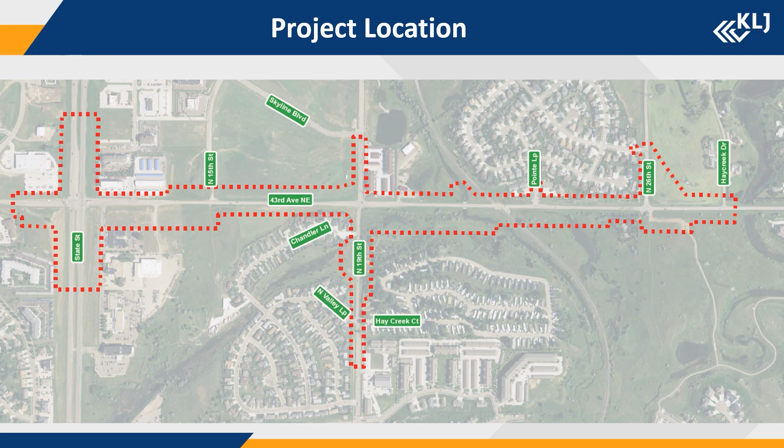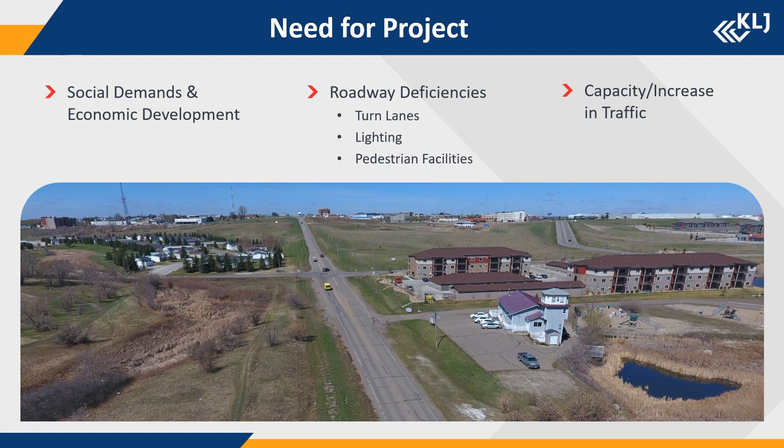Now to talk about the need for the project. Social and economic demands, safety, and roadway deficiencies are the main drivers. These issues relate to traffic operations, mobility, and network connectivity throughout the corridor. There are several new developments adjacent to and surrounding the corridor that require upgraded infrastructure to continue to thrive. The current roadway only accommodates a single lane of traffic in each direction. Along with increased development comes increased traffic. The proposed road will increase traffic capacity and improve safety with the addition of turning lanes, intersection controls, street lighting,

and pedestrian facilities. We want to be sure to communicate a little bit about the project vision here. The project will tie into the previously constructed 4-lane road west of State Street and the proposed 3-lane road east of 26th Street that Burleigh County is scheduled to build in 2021. The forecasted traffic volumes on the east side of this project are about 2/3 of the anticipated future traffic volumes on the west side. From west to east through this corridor, the adjacent land use also transitions from commercial to residential. So a project objective is to determine the vision of a corridor and how that transition will actually take place. There are options that will determine where the roadway will transition from a 4-lane to a 3-lane.

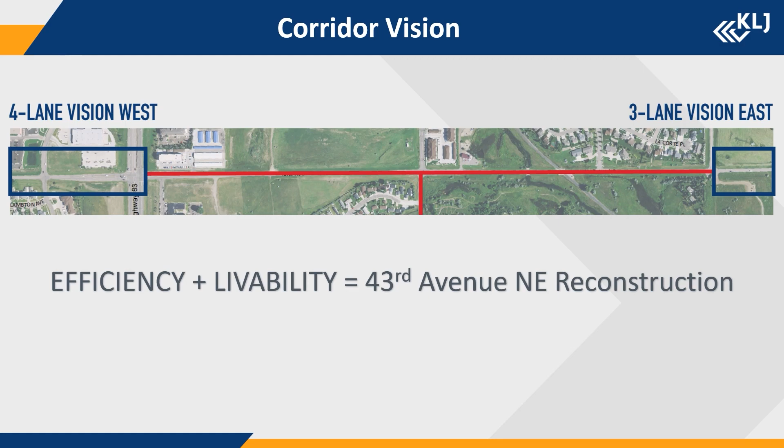These options will be explained in detail later on. The corridor vision, which includes things like number of lanes, intersection types, pedestrian features, defines and balances the relationship between efficiency and livability as this transition occurs. There are two primary alternatives proposed for this project. First is a build alternative, and then also a no-build alternative. The no-build would leave the corridor as it is today without any proposed improvements. The build alternative would reconstruct and urbanize the corridor.

Accompanying the build alternative are several different sub-options to be considered. In the next several slides, I will discuss the proposed improvements and options in detail to help provide a full understanding of the project.

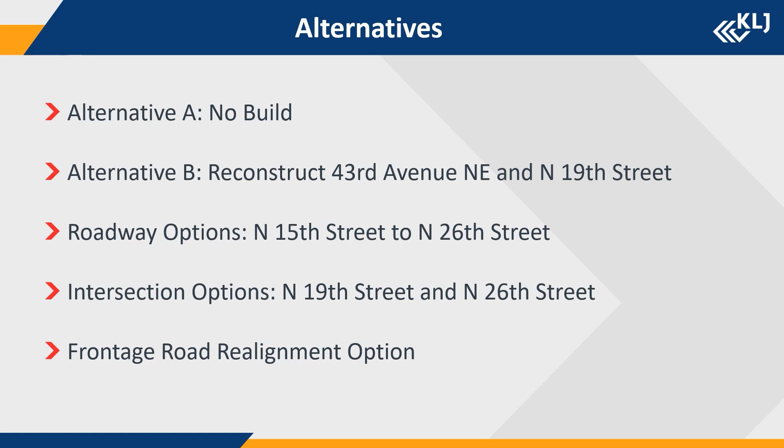This graphic depicts a typical section of a 4-lane road. This typical section includes 2 lanes in each direction, a raised median, a shared use path on the south side of the road, and a sidewalk on the north side. For reference, this would be basically the same roadway configuration as the 43rd Avenue project constructed this past summer between Washington Street and State, but with the shared use path transitioning to the south side of the road.

This is due to increased pedestrian infrastructure and potential connectivity on the south side of the corridor. Pedestrian crossings and a new traffic signal would be installed at the State Street intersection to facilitate this transition from the north to the south for pedestrians.

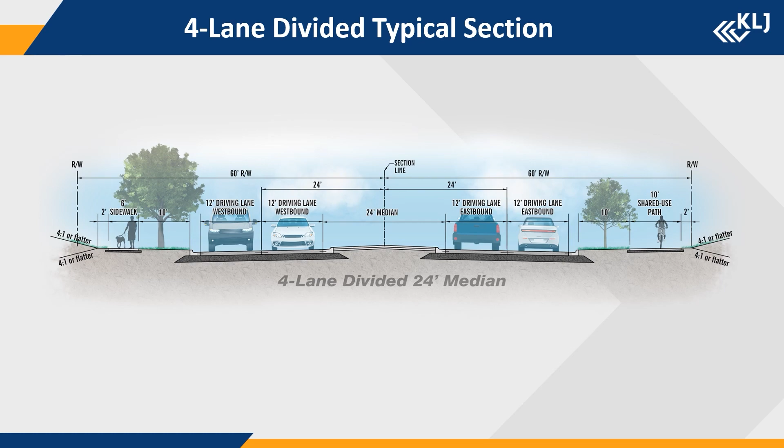In this graphic, we're showing a typical section for a 3-lane roadway. The typical section includes 1 lane in each direction, a raised median, a shared use path on the south side, and a sidewalk on the north.

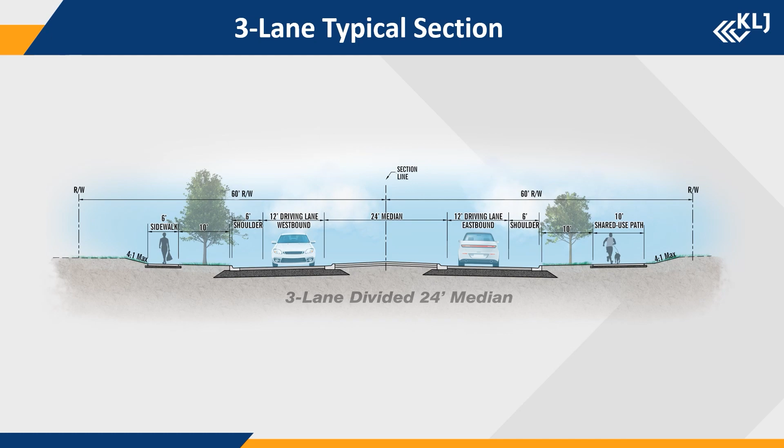You'll note that the additional shoulder is included with this typical section. That's intended to provide a refuge for maintenance or stalled vehicles, as well as providing additional area for snow storage in the winter. Over the next several slides, we will step through the proposed options as seen from plan view.

As I mentioned, this project is a continuation of the reconstruction that just took place this past summer in 2020. Beginning at the very east end of that project, the State Street intersection, this new proposed road will start with a 4-lane section as shown on this concept drawing.

There will be a new traffic signal installed at State that will accommodate east-west pedestrian crossings on the north and south side of the intersection.

At the intersection of State and 43rd, double left turn lanes will be striped for southbound motorists turning from State Street left onto 43rd Avenue heading east. The shared use path on the north side of 43rd Avenue west of State will cross from the north to the south at this intersection.

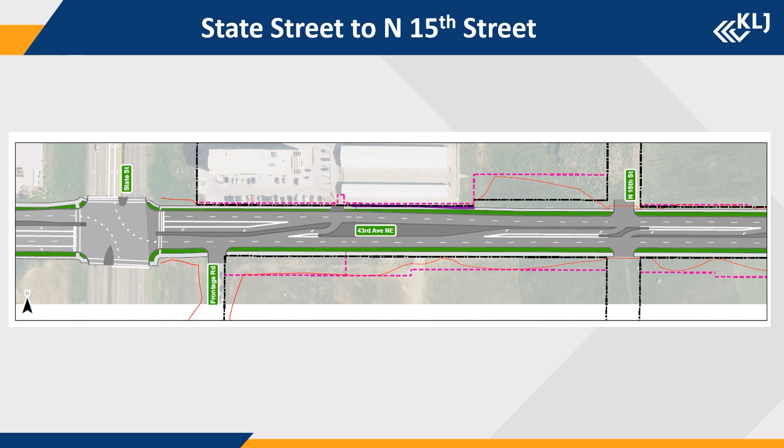Then a sidewalk will be constructed on the north side of the new proposed road heading east. This project will also address the access to the State Street frontage road.

The current frontage road intersection with 43rd is only about 180 feet from the State Street intersection, and it's at a fairly steep grade. So an alternative is to realign the frontage road to the east and create a connection with 43rd via 15th Street.

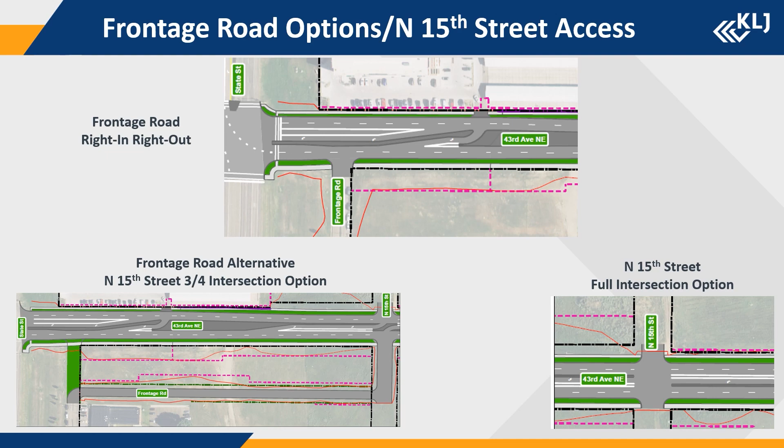The realigned frontage road could potentially intersect 43rd with either a full access or 3/4 access intersection. However, it should be noted that this option increases construction costs and requires purchasing additional right-of-way.

The road would be divided with a raised median from State to 19th. Then a 3-lane road would continue east from 19th to the end of the project at 26th. One of the benefits of this option is the additional westbound lane acts as a climbing lane for large vehicles upon departing the North 19th Street intersection.

Again, to reiterate the intent for both options, 43rd Avenue would ultimately be a 3-lane road east of 19th all the way to the end.

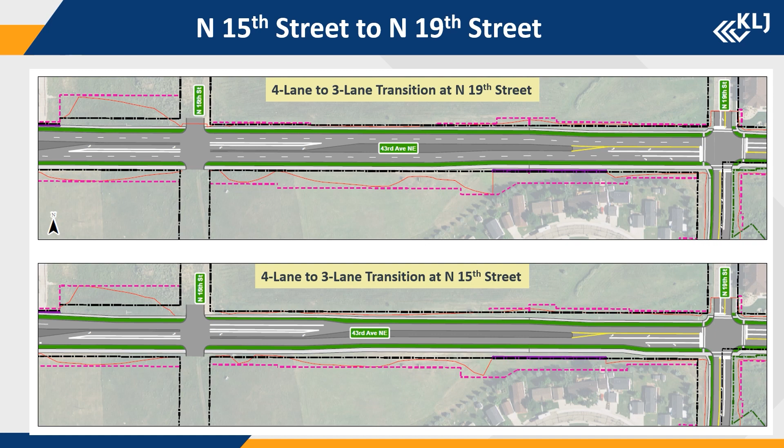43rd Avenue will either have a raised median, similar to the option west of 19th, or it'll be a flush 3-lane roadway similar to East Divide Avenue from 26th to the Bismarck Expressway if you've driven that stretch of road.

A key difference between these options is access to the River of Hope Church and daycare. If a flush median is selected, the current church access is proposed to be shifted east to allow adequate storage for the westbound left turn onto North 19th. This configuration would maintain full access to and from 43rd.

Drivers intending to travel east would need to utilize the proposed roundabout to turn around.

Further east from 19th is the railroad crossing. As part of this project, the crossing will be improved as part of the primary build alternative. The crossing will remain a concrete at-grade rail crossing with larger crossing arms and pedestrian crossing facilities on each side.

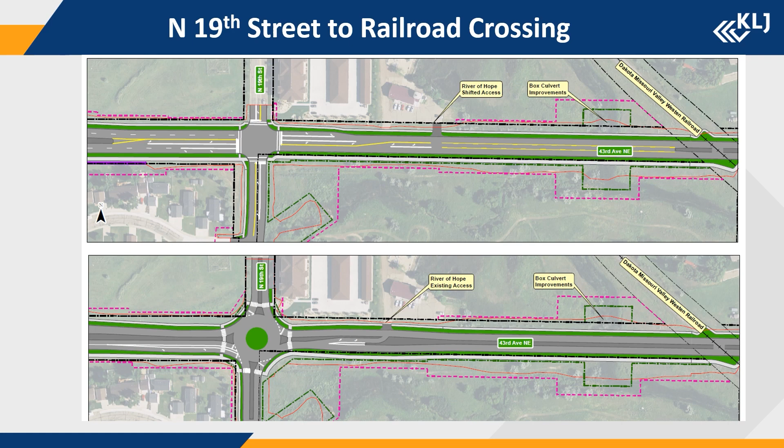A grade-separated crossing was considered, but we determined that wasn't going to be cost-effective, mainly due to the terrain in the area and also the fact that there is a low volume of rail traffic.

Similar to 43rd Avenue, these options are based on the intersection type that will eventually be selected at the 19th and 43rd intersection. Currently, 19th is a two-lane rural section from North Valley Loop to 43rd Avenue. At the existing intersection of 43rd Avenue, the southern approach of 19th is offset approximately 20 feet to the west of the northern approach. Depending on the intersection type selected, 19th Street may have to be realigned to line up with the northern approach. Regardless of the intersection type, North 19th Street will be reconstructed from 43rd to North Valley Loop as a 37-foot road with curb, gutter, and storm sewer.

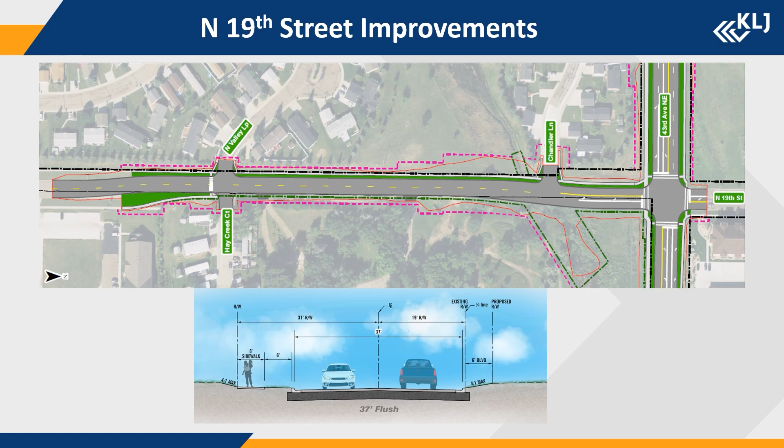A sidewalk will also be constructed along the west side of the roadway, as shown in the exhibit on screen. Also, the existing culvert under North 19th Street is proposed to be replaced with a box culvert to better facilitate drainage. All right, so now we'll focus our attention on the 19th Street intersection traffic control.

One option here is a roundabout intersection. This would be constructed with a 130-foot inscribed circle diameter. The roundabout would be centered in the intersection and would not require realigning the 19th Street south leg here, as I mentioned earlier. The roundabout provides a capacity benefit and added safety benefits by reducing conflict points and reducing the severity of crashes. The roundabout intersection would include a continuation of that raised median heading to the east of the intersection as well. Another option is a signalized intersection.

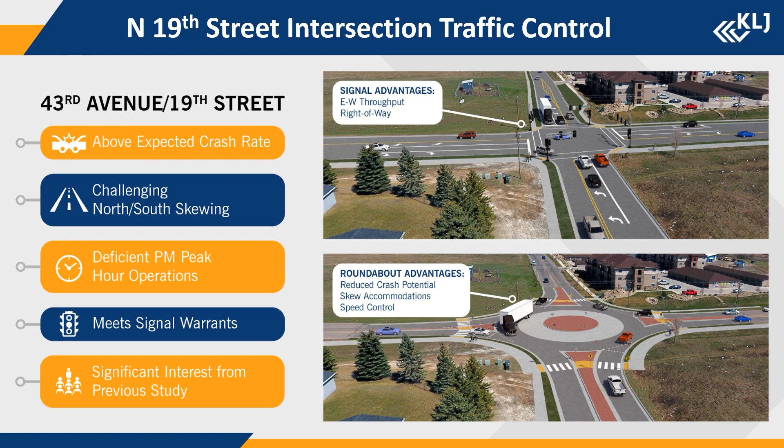This would construct a standard intersection layout with signals. However, it would require realigning that south leg to better align the north and south approaches to the signalized intersection. The signalized intersection has the advantage of better adaptability if traffic numbers grow beyond current traffic projections, and it's consistent with the corridor west of State Street as well. However, this option would require more right-of-way acquisition and greater wetland impacts.

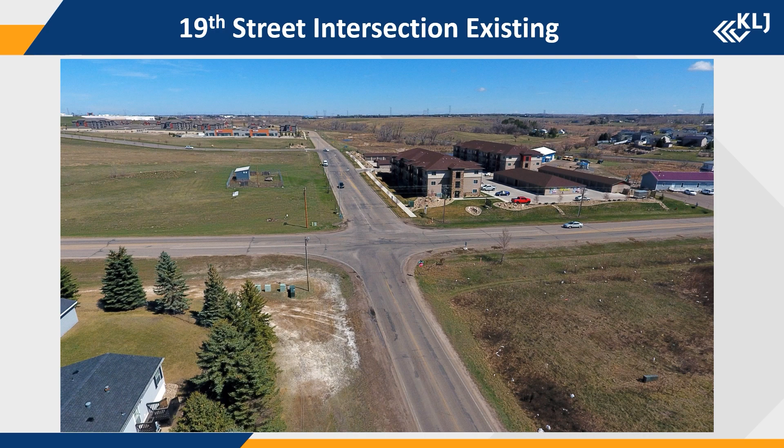The next few slides just show the same intersection with a couple of different perspectives. This slide is an aerial photo of the existing intersection looking north. And here, again, you'll notice the offset and the skew that I've been mentioning. That offset actually blends pretty well with the roundabout at this intersection.

Again, roundabouts naturally slow speeds in the whole corridor, and with those slower speeds comes reduced risk and reduced severity of crashes. Roundabout crashes are generally merge and diverge type crashes, where signalized intersections tend to be more crossing type crashes. Another note is that roundabouts have about 25% of the potential conflict points of a signalized intersection by comparison. Although the roundabout does not have protected pedestrian crossings, it does reduce the number of lanes pedestrians have to cross at a given time. This gives pedestrians time to focus only on one lane at a time when crossing.

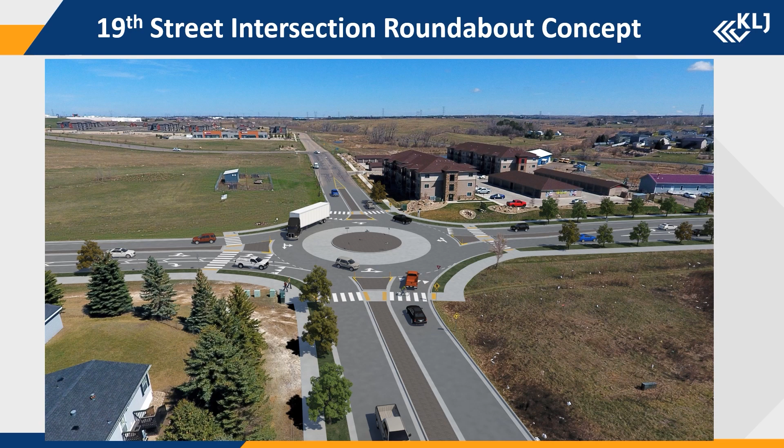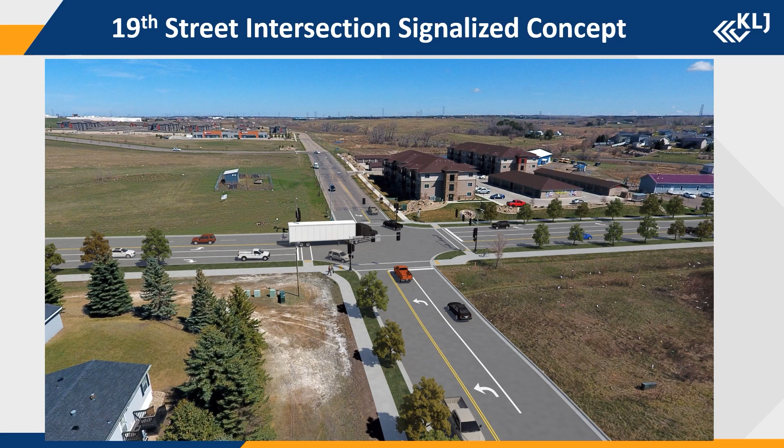The signal will also adapt to increased traffic over time. Again, this option would require realigning 19th Street on the south approach so that the north and south legs would line up across from each other. And that increases the amount of right-of-way acquisition and the degree of wetland impacts.

Okay, and now we are moving east in the area of the 26th Street intersection. The graphic on your screen is showing three different options for this intersection. The first, that's shown in the top pane, would reconstruct the intersection in its current location. This option would function adequately as a two-way stop-controlled intersection. However, if a signal was ever needed, the steep grade of 43rd would not allow pedestrian crossings to meet standards required by the Americans with Disabilities Act.

These requirements restrict the cross slope of a protected crossing. If a signal was installed at the existing location, cross slopes would be 2 to 3 times greater than what's allowable. The steep grades also present a safety concern when vehicles are trying to stop at a red light during winter driving conditions. So then when you look at the two panes in the lower right, the next two options shift the intersection to a flatter point along 43rd Avenue, uphill and to the east. At this location, two options have been identified, a roundabout and a signal.

By shifting the intersection east, the intersection location would meet ADA requirements if a signal is ever warranted in the future. It's worth noting that the roundabout option would allow more effective intersection control today with the current project, as opposed to waiting for traffic volumes to increase and only then requiring a signal. There's an inset picture on the lower left of your pane that we'll address as well.

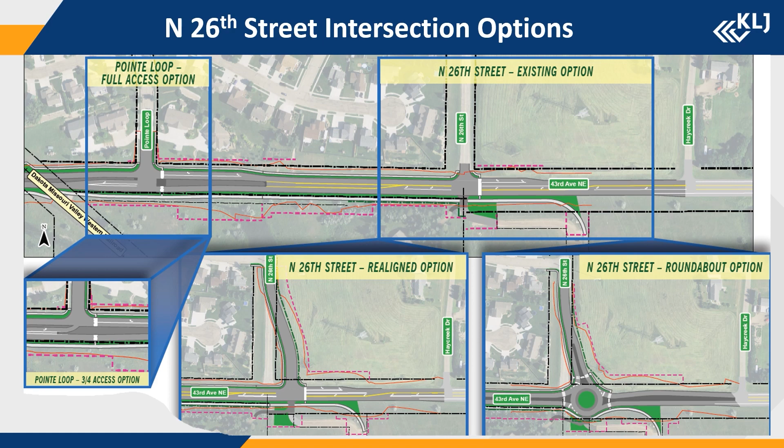The access reduction is based on City of Bismarck's access management policy. The policy permits no more than 5 access points per mile on each side of a principal arterial, and prescribes a minimum spacing of a quarter mile between high density or commercial access points.

It's worth mentioning that along with surface improvements along the corridor, this project will include significant municipal utility improvements. The new water main continues the city's implementation of its master plan. The primary component is extending a 24-inch transmission pipeline from State Street to near the intersection of 26th, along with valving to enable pressure zones 2 and 3 interconnection options.

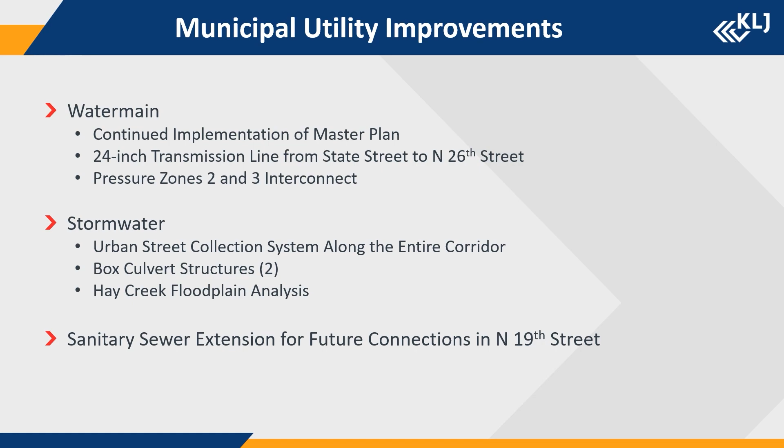The existing road conveys stormwater via roadside ditches right now, so the proposed project would incorporate curb and gutter along with new storm sewer that will outfall into Hay Creek. Box culverts will be installed at the low end of 19th and at the Hay Creek crossing of 43rd Avenue, which also will require a floodplain analysis of the surrounding areas. Finally, a small portion of sanitary sewer will be built extending along 19th to the south.

The next couple of slides are going to address construction phasing. Red indicates where we anticipate work occurring, and yellow where we anticipate detours. Due to the terrain and proposed improvements, closing the roadway during reconstruction and doing this in phases is really the only cost-effective approach to getting it built.

The project is proposed to be done in 3 phases. 2 phases will accomplish the 43rd Avenue construction, and the 3rd phase will be for 19th Street. Phase 1, shown on your screen here, would close 43rd Avenue from 19th to 26th and reconstruct that portion of road and utilities. Traffic would be detoured onto Centennial Road, Century Avenue, and 19th Street during this closure. Access to the Pointe subdivision would be maintained at North 26th during this closure.

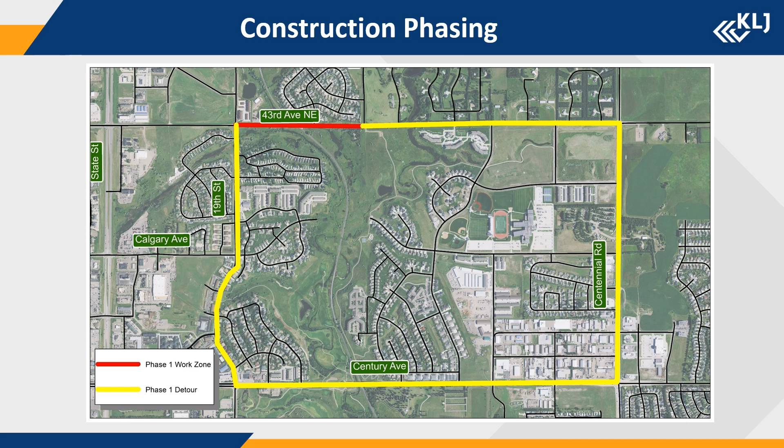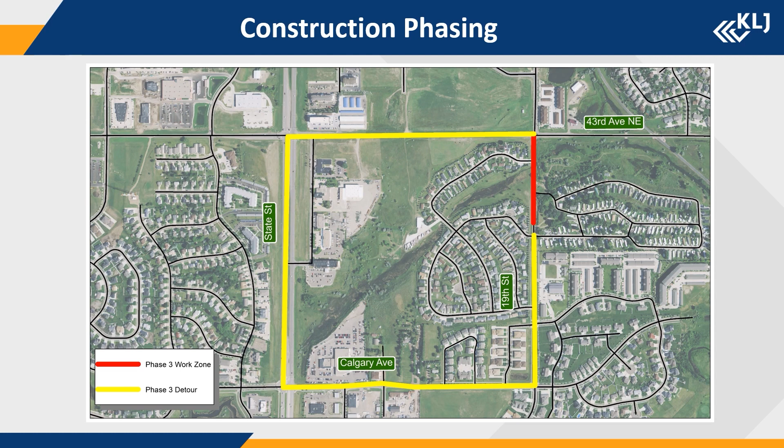As I mentioned, phase 3 is 19th. The 3rd phase will close 19th just south of North Valley Loop, up to 43rd Avenue. Chandler Lane and North Valley Loop will access North 19th via the southern approach of North Valley Loop, and access to Yucca Lane will be maintained as temporary during the closure. Traffic would be detoured onto Calgary, State Street, and 43rd Avenue.

Because the project will utilize federal aid funding, impacts for each alternative have to be determined and an environmental document prepared explaining all alternatives and options, outlining the environmental impacts for each one. These impacts include items such as wetlands, cultural, threatened and endangered species, and noise considerations.

Depending on the options, wetland impacts range from about 1.16 to 1.19 acres of permanent impacts. There are 2 options to mitigate wetlands impacted due to this project, either on-site mitigation or purchasing wetland credits. It's the intent of this project to mitigate wetland impacts on-site. Right-of-way acquisition ranges from 2.1 acres to 3.7 acres, depending on which roadway configuration is selected. Temporary easements are estimated to range from about 6 to 8 acres, depending on the alternatives again.

Following an evaluation, the proposed project was determined to meet the definition of a Type 1 project, thereby requiring a traffic noise analysis. Existing and projected future traffic noise levels were modeled to determine the potential increase in noise levels as a result of each alternative. The traffic noise model used a worst-case scenario methodology whereby the build alternative and options anticipated to result in the highest traffic noise levels were modeled.

For this project, the primary build alternative was modeled with varying intersection options, primarily roundabouts, occurring between State Street and 26th. It was determined that none of the receptors along the project corridor would be impacted by the build alternative or any of the other options analyzed. Therefore, traffic noise abatement was not considered for this project.

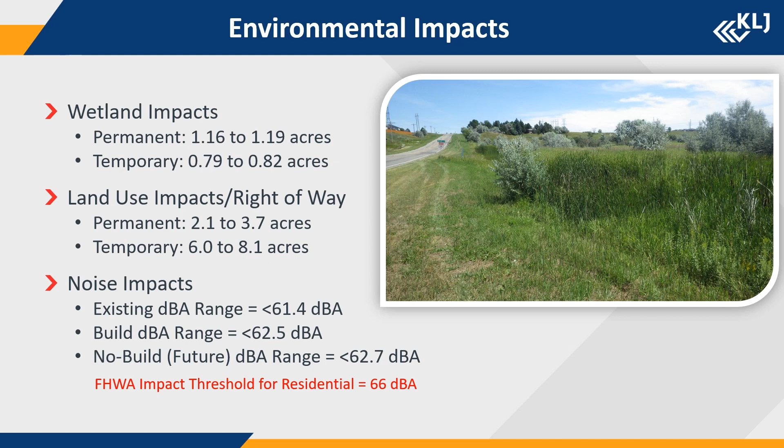We also wanted to provide some financial information during this presentation. In total, the project is estimated to cost between $20 and $22 million. These costs include roadway and utility construction, right-of-way acquisition, utility relocations, professional services, and some contingency built into these estimates.

To assist in project costs, the City of Bismarck can utilize up to $4.8 million of federal aid funding distributed by North Dakota Department of Transportation. That $4.8 million is not available until 2024, so the city will pay that portion of the project in advance and then receive reimbursement in 2024.

After the federal share, this leaves a balance of $15.2 to $17.2 million that needs to be paid by the City of Bismarck. The project is eligible for funding through the half-cent sales tax program, but we wanted to make sure to note that final decisions regarding project funding are pending.

The next step is to present the alternatives discussed to the Bismarck City Commission. We anticipate that occurring in February. At that point, the Commission will decide what alternative and options should be carried forward into final design.

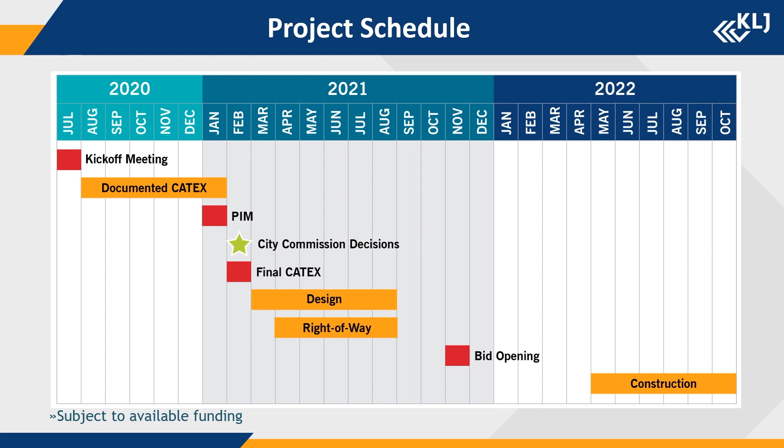To summarize this presentation, we want to note that final decisions are pending, and we do appreciate your input. We've developed multiple alternatives and options along 43rd Avenue, again from State Street to North 26th Street. These options range from different intersection treatments to various lane configurations. Prior to finalizing any alternatives and presenting to the City Commission, we do welcome your feedback.